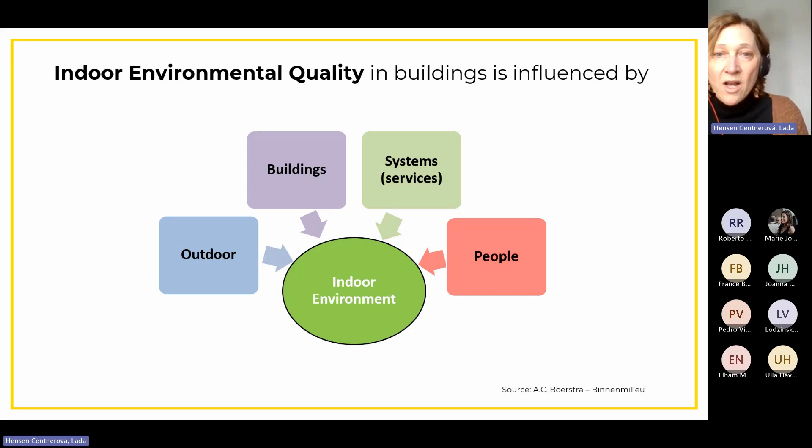First of all, what is indoor environment quality in buildings? Just to be on the same line, I would like to show you that the indoor environment in buildings is actually influenced by the outdoor environment, by the buildings themselves, by building systems, and by people. So I will start here with outdoor.

We live nowadays in a period when climate change is getting more and more obvious. Everybody gets confronted with it, and we have to adapt ourselves and our buildings. Our landscapes are changing, weather conditions, and actually HVAC systems. We have to adapt to it.

So what can we do about it? We have to adapt. You are actually joining the Healthy Building Design Competition, which is organized by REHVA. And I'm not sure if you all know it, but REHVA is a European Federation of National Associations of HVAC engineers—HVAC: heating, ventilation, air conditioning.

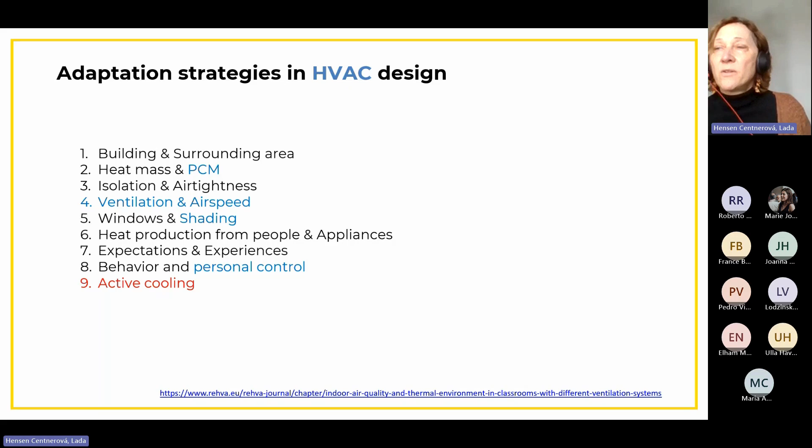First, adaptation strategies related to buildings. You know it—one of the consequences of climate change is the urban heat island effect. I don't know if you heard about that, if you learned it at university, but actually the first time this was referred to was in 1799 in New York, where Noah Webster reported a 0.8 degree difference in year-mean temperature between New York and rural areas.

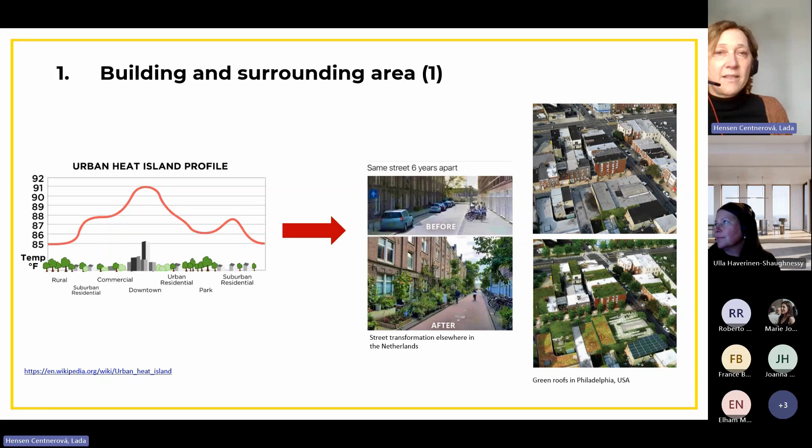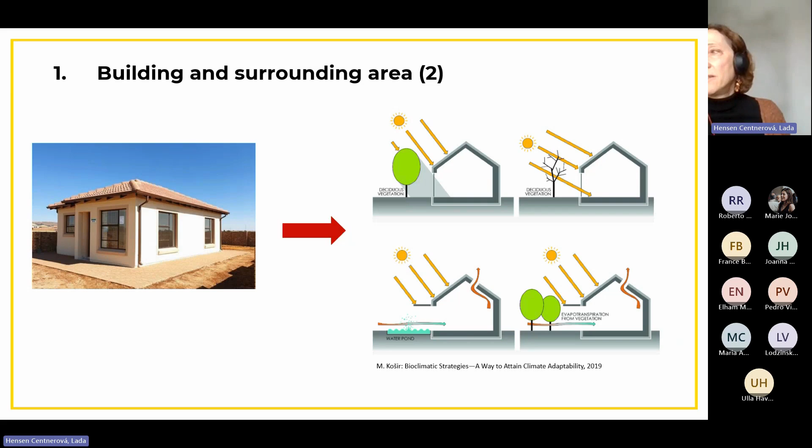Of course, nowadays these differences are much bigger. I live in the Netherlands, and here the year-mean temperature difference between big cities and rural areas is 3 degrees, but on a day basis in summer it can be even 7 degrees. So of course you should take this into account in your design. This is what you can do: start with the direct surrounding of your building, with the possibility of trees which give shade in summer but let the sun shine through in winter. But yeah, I think you know this.

Another thing, if we look at building constructions: we all know that old massive buildings are also very nice and cool in summer. I took here the most extreme example I found, which is Uçhisar in Turkey. These heavy, massive old buildings are cool inside even in summer, because of that large thermal mass, which acts as a heat storage, or if you would like, a battery.

On the other hand, light constructions raise temperature very fast, even above the outdoor temperature—here again an extreme example, just a tent. So heavy construction seems to have an advantage, but it is actually not always possible or desired to realize heavy construction. So it is well possible to create a similar effect in light constructions by applying phase-changing materials. PCMs have the ability to store a large amount of energy in the form of latent heat. So that's another possibility.

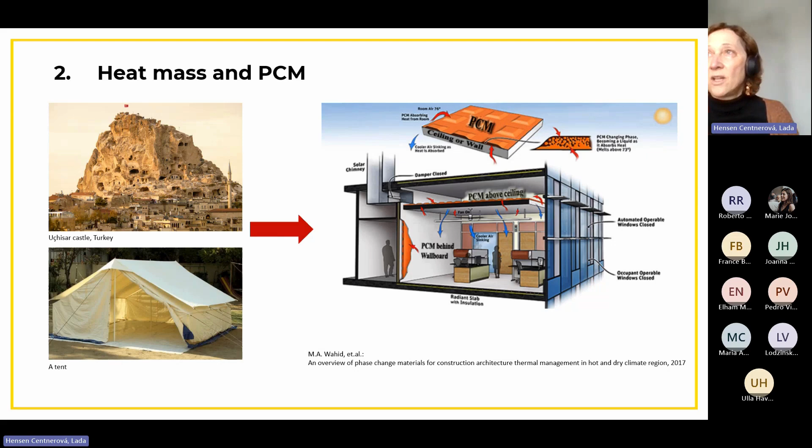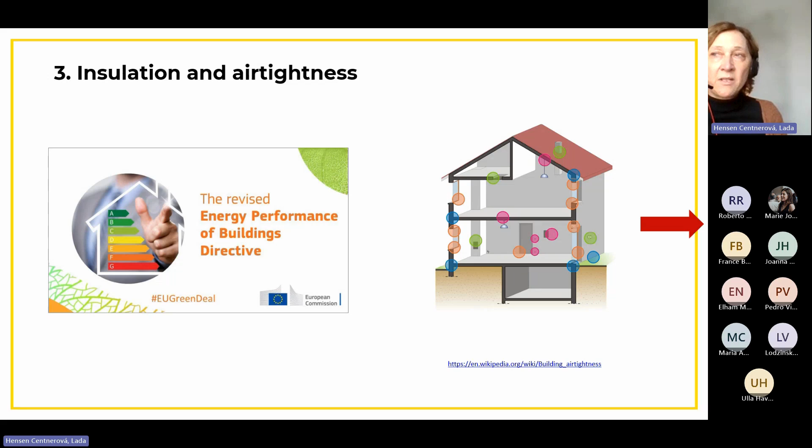With climate change and changing buildings, we have a problem related to still growing stronger norms about insulation and airtightness. I'm not sure how the situation is in your country, but I think everywhere in Europe buildings are getting more tight and airtight, which is reducing heat loss through the building envelope. That's very good for winter, but if we don't have other precautions, then we get problems in summer.

The solution can be good functional ventilation, or even higher airspeed indoors. I'm not speaking about just the standard ventilation, which has to maintain good indoor air quality, but also natural ventilation, which can be caused by two natural forces: pressure differences or temperature differences, or a combination of both. Here are some extreme examples of natural ventilation and fast air movement, higher airspeed using ceiling fans.

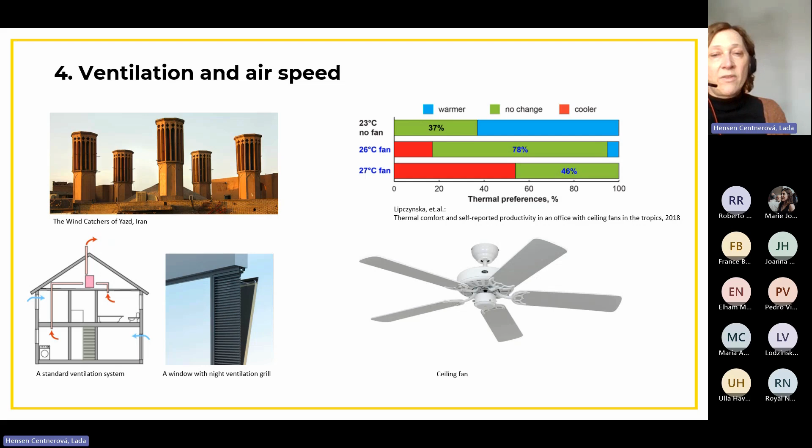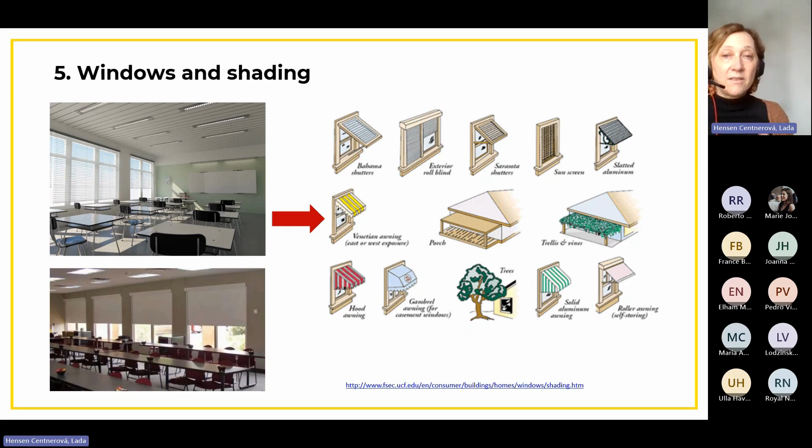But of course, you have to take into account that there must be a balance between sufficient daylight, view, privacy, and unwanted solar radiation.

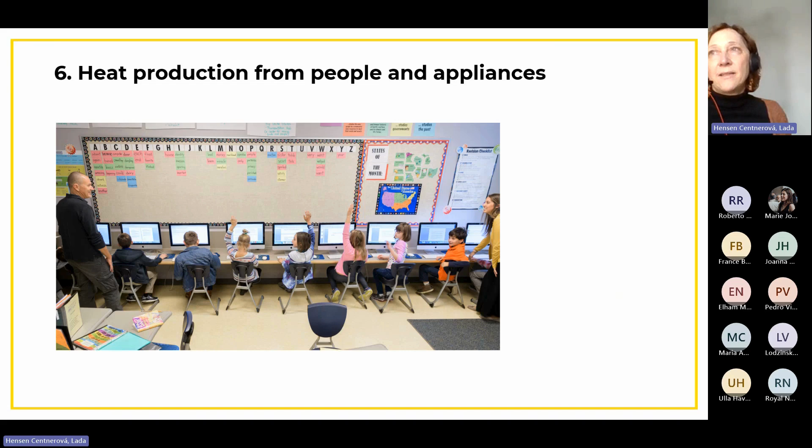Another adaptation strategy or problem from my list is heat production from people and appliances. I know in primary school this problem is less urgent, it's not like at the university where all students are sitting with laptops. But nevertheless, I found an illustrative photo from a primary school where all kids have a laptop. But here, this is not such a big problem.

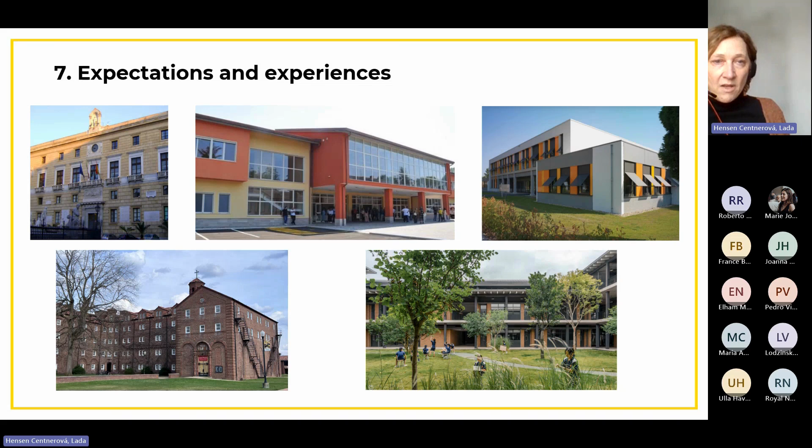Another thing I tell my students is that you have to take into account design expectations and previous experiences. Here's an example of schools which I looked up on the internet, most of them supposedly in Italy. Of course, if you go to a very old, massive building, you somehow expect a little bit different environment than in a very light new building. So all this is related.

You don't have pupils here who can adapt themselves except to take off a sweater, but there is the boss, and that's the teacher.

So this was just a short, quick introduction to what you should take into account when redesigning a school in particular.

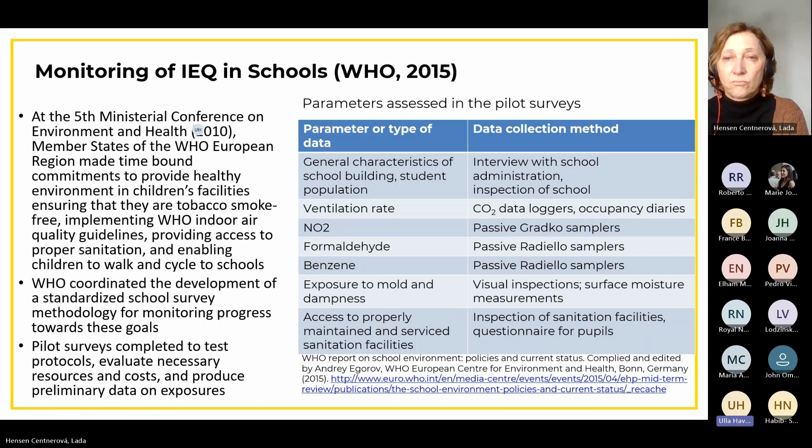The data collection methods are listed there. They may be a little outdated now; there are new methods perhaps, but overall it was assessed that these are important factors for school environment and indoor quality. Many of these are indoor quality related. If I remember correctly, based on the pilot studies, most issues were found in those schools in areas providing inadequate ventilation, issues related to dampness and mold, and also thermal conditions in the classrooms. So those are important things to consider.

An example of how this lead-by-knowledge principle could work is one of our studies in Finnish elementary schools, where we collected data from basically all Finnish elementary schools using questionnaires for school principals. We found that inadequate ventilation was reported in 38% of the school buildings, dampness and moisture problems in 27%, and unsatisfactory temperature in 11%.

We also did some subsampling with objective measurement data collection, including measured ventilation rates, and those results were quite well aligned with the principal-recorded issues, where our current national guideline is a minimum of 6 liters per second per person ventilation rate, and roughly 60% of schools are below that value, I believe.

So we also collected data from students using questionnaires about their health and background variables, and found with these two data sets combined that these school-level indoor environment quality indicator variables that the principals reported could explain a large part of the school-level variation observed in self-reported upper respiratory symptoms among students. So improving these conditions in Finnish schools could be effective already.

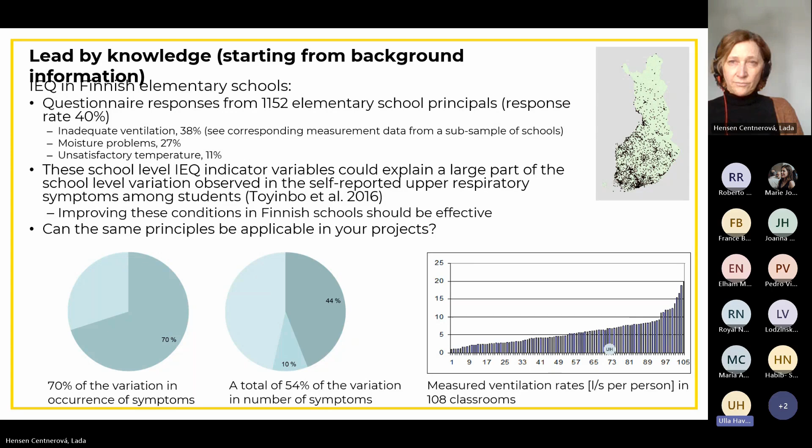We could explain a large part of the school-level variation in the reported symptoms. So it's just a question of whether these same principles could be applicable in your project. I think it depends on the region or the country. Some of the issues are country specific, but overall, starting from background information collection is always important, so you can think about ways to collect such background information that helps you successfully design and complete your projects.

I was involved with a European study on dampness and mold called the HITEA study, conducted in the Netherlands, Spain, and Finland. As a result, it was found that the prevalence of moisture problems in school buildings was 20% in the Netherlands, 41% in Spain, and 24% in Finland.

This was back in, I think, 2008 to 2012, so about 10 years ago. It was also found that the occurrence and severity of dampness and mold may vary across geographical areas, which can be partly explained by building characteristics. Health effect studies were also conducted and found that avoidance or remediation of damp and mold problems in school buildings may benefit students' respiratory health.

I haven't worked a lot on filtration and air cleaning technologies, but wanted to show some examples, mainly from the point of view of the possibility to filter and clean air. If you have a school building like the figures on the left from an African country, very open, leaky buildings, there is limited possibility to filter anything.

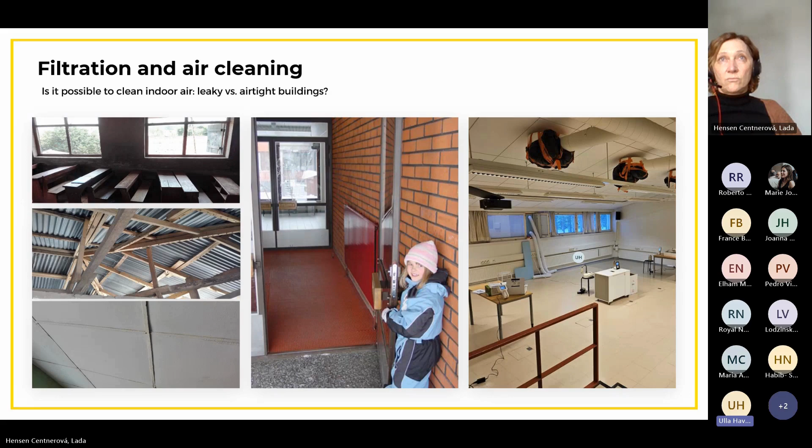I have been involved with several studies looking at the associations between ventilation and health and academic performance. Here are results from an early study done in the United States on the association between substandard classroom ventilation rates and students' test scores, where we found a linear association between substandard ventilation rate and these test scores. So it's an important parameter to think about when designing school buildings.

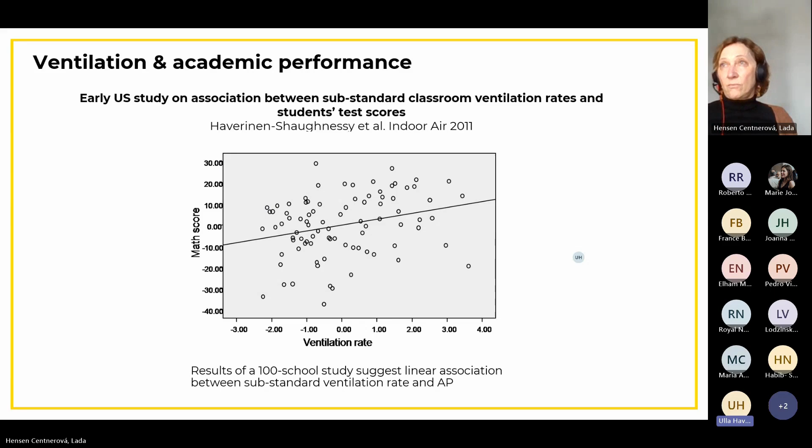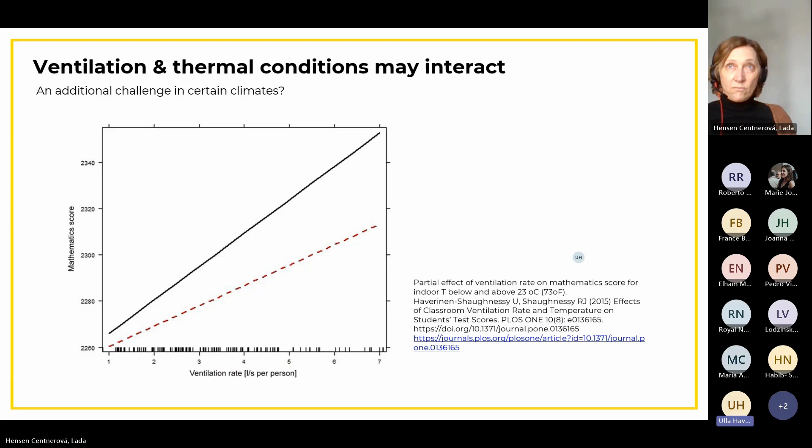We also looked at the effects of temperature on test scores, and it's quite interesting—it looks like there may be an interaction there, such that the effect of ventilation is stronger if the temperature is higher, and this can be an additional challenge in certain climates, perhaps.

And as has been brought up quite strongly, ventilation also associates with illness absence, especially since the COVID pandemic. There have been a lot of studies and even review articles emphasizing that ventilation is really important and potentially decreases illness absence and mitigates the spread of infectious diseases.

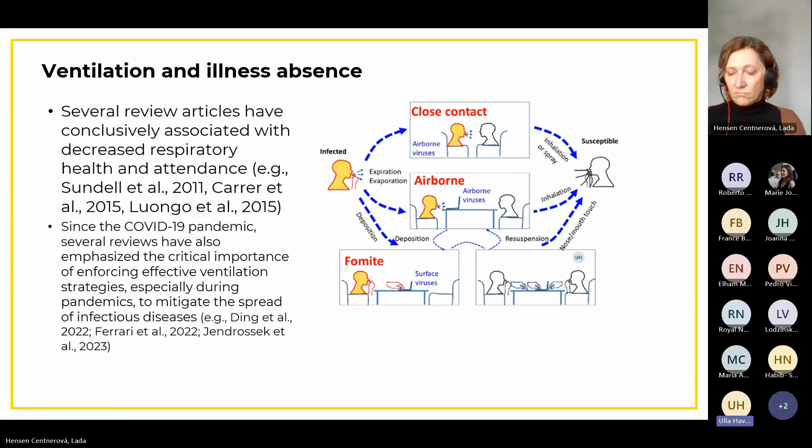On the picture, there are different pathways how infectious disease can be transmitted. They can be transmitted by air or close contact, or also by indirect contact to contaminated surfaces, which brings us to the cleaning aspects and cleanliness.

There we can say that inadequate cleaning also leads to accumulation of dust and non-visible ecological niches, which can promote biological contaminants, including viruses.

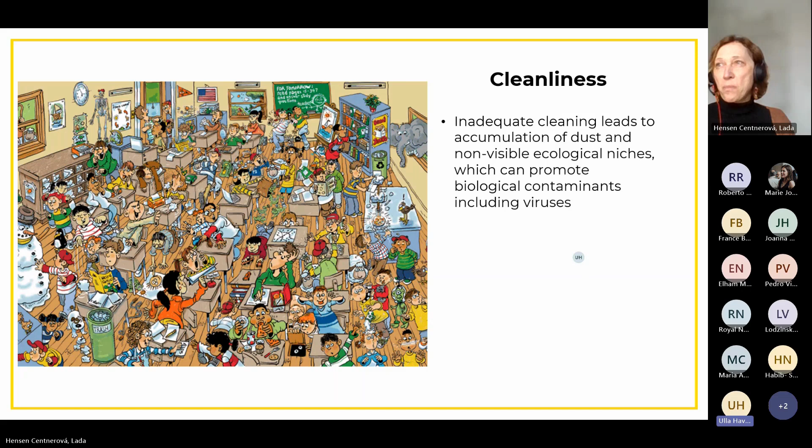Here's an example of a study where we found a statistically significant association between the probability of weekly absence due to gastrointestinal illness and desktop ATP levels, which ATP is an indicator of biological contaminants on the surfaces that were monitored.

It was also found that with respect to cleaning effectiveness, critical points to consider include the frequency of cleaning of different surfaces, especially high-touch surfaces, training the custodians and school personnel, as well as monitoring and feedback.

In this study, it was not possible to differentiate whether the microorganisms on the desktops were coming from prior occupants or by settling from the classroom air, and also the ventilation may play a role in that settling of microorganisms on the surfaces.

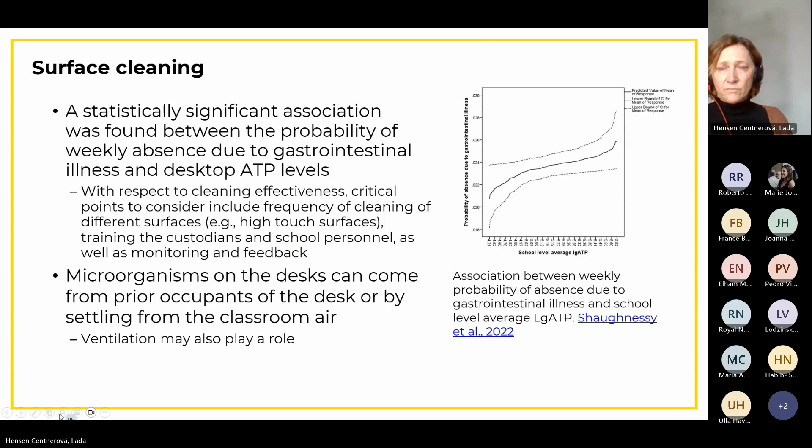There are some ways to practice what I've called pollutant avoidance, including selecting building materials and products and trying to decrease chemical emissions. Also, pets and plants are sometimes found in schools, sometimes in large numbers, and there can be—some people think they have positive effects, some think negative effects—but in any case, for sensitive or allergic individuals, perhaps it's not so beneficial to have them in the classroom.

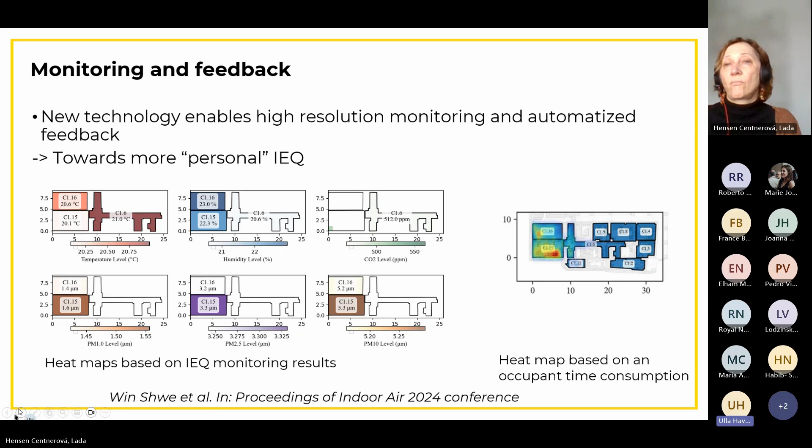Interesting area of research—there are new technologies that enable high-resolution monitoring and automatized feedback in this area of indoor environment quality and indoor air quality. For example, I'm showing heat maps based on continuous monitoring results and also occupant time consumption, and perhaps developing these technologies can help towards more personal indoor environmental quality, allowing occupants some way of having better influence over their own personal environment.

So I don't know if we have time to look at this example. It was actually just recently. I think, yeah, just go ahead.

We have been involved with this school district-wide renovation follow-up study over the past 6 or 7 years in the US, in collaboration with the University of Tulsa and the University of Colorado Boulder, where we have followed up district-wide renovations, indoor environmental quality, and illness absences.

The research in brief was such that there were over 50 schools in this one school district that had over 600 million dollar bond renovation program, where renovations were implemented in about 45 schools across multiple different projects. Significant upgrades were done, including ventilation systems and improvements in cleaning effectiveness, as well as with the aim to conserve energy.

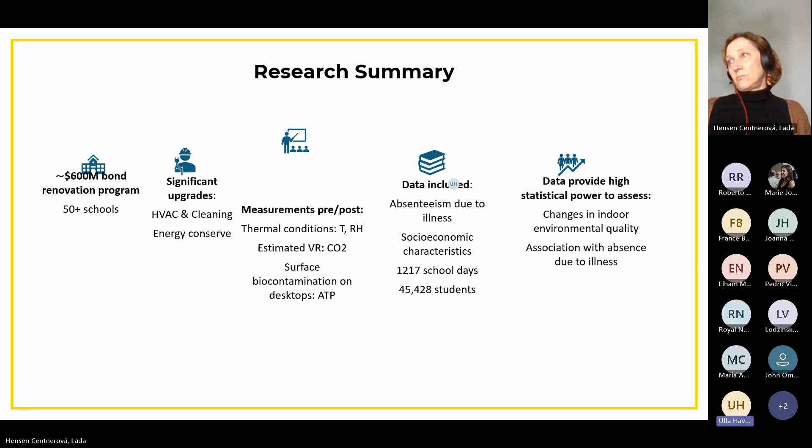So energy efficiency and energy retrofits were included. We followed up the conditions before and after renovations, including thermal conditions, estimated ventilation rates using carbon dioxide monitoring, and also monitoring of surface biocontamination by ATP. We also had access to absenteeism data specifically related to illness and the type of illness. These data were collected by the school district, and they also provided us socioeconomic characteristics of the students over this whole six-year follow-up period, including a total of 45,000 students. So the data provide high statistical power to assess changes in indoor environmental quality and association with absence due to illness.

We assessed the number of days absent per school year by students, and we found statistically significant associations between number of days absent and the renovation status. Absence days due to respiratory illnesses were significantly decreased, as well as absence days due to gastrointestinal illnesses. In addition to these associations with renovation status alone, there were independent associations with higher number of days absent due to respiratory illnesses associating with lower ventilation rates and higher indoor temperatures and relative humidity, whereas higher number of days absent due to gastrointestinal illnesses associated also with higher indoor temperature, relative humidity, and ATP.

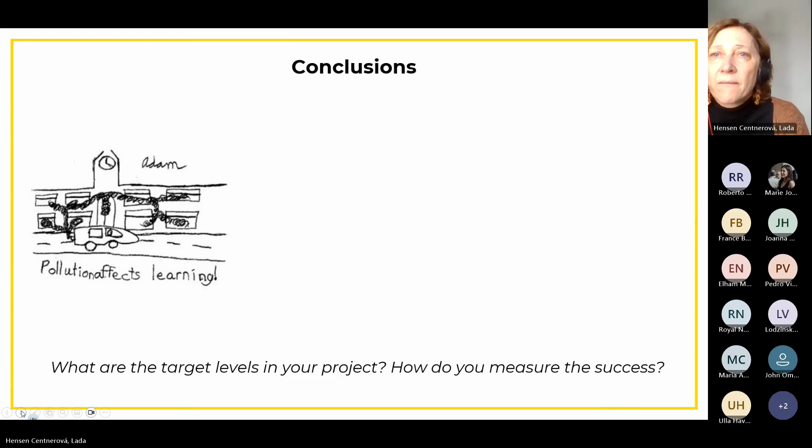So based on this example, we concluded that ventilation rates were significantly increased and biocontamination levels decreased after renovation. Decreased number of days absent were associated with improved ventilation, cleanliness, and thermal conditions, and the results support maintaining good indoor environmental quality for better school health and reduced absence due to illness. It was also found to be helpful having continuous monitoring and feedback to reach and maintain the target levels.

I think these kinds of endpoints are good to have and assess, and in this design challenge, maybe it's good to think about what are the target levels in your projects and how do you measure success.

Overall summary: indoor environmental quality is frequently compromised in schools worldwide. Growing evidence is linking poor IEQ in the classrooms to student health and academic performance. I think especially schools and the education sector as a whole have a large potential for health and sustainable development, leading by example in providing healthier and more productive environments, while also reducing their carbon footprint.

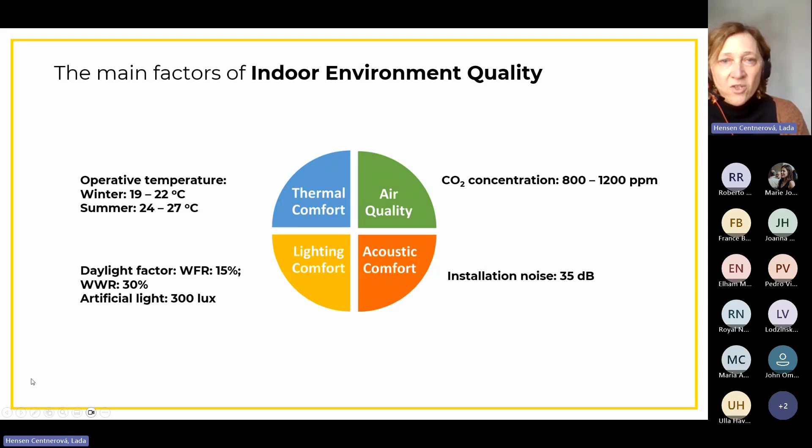I just put here a few numbers for each of these factors, which are generally used. But let's just go further.

We said that already a few times. Buildings are used by people, and how do people actually experience that indoor environment? Maybe you are aware of that. If not, I put here a slide I like to use in my teaching, that people feel indoor environment with 4 of the 5 senses, the main senses.

As you see here, with our skin, our touch, we sense temperature differences, humidity. With our eyes we see, with our ears we hear, and with our nose we smell indoor air quality.

But not everything. There is often that problem that we don't see the air which is bad, because we can smell tobacco smoke, but you are not allowed to smoke in schools. Sometimes we smell cleaning chemicals, part of VOCs, and sometimes we smell people odor, but not everything. So these are the senses by which people experience buildings, and I think you, as designers, have to take into account all of these senses, all of these parts.

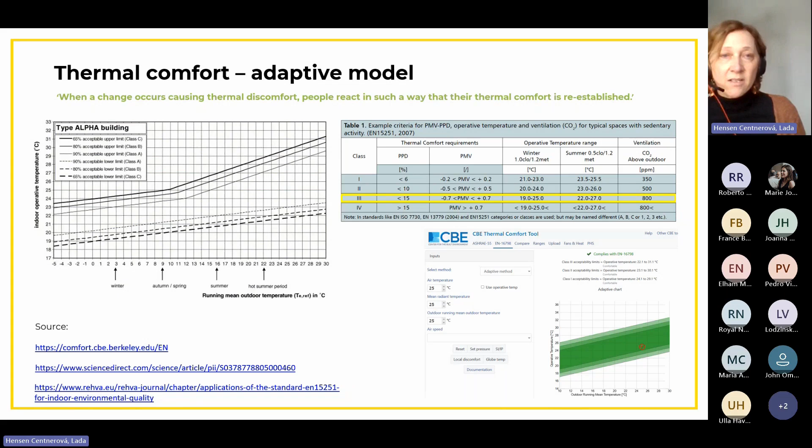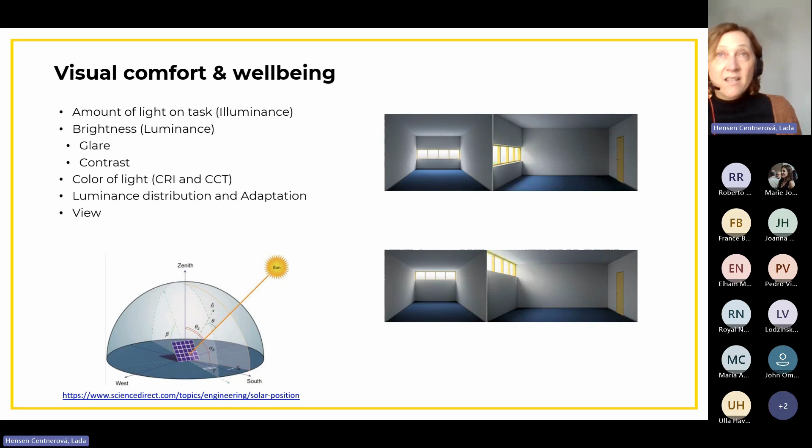Here I put something about lighting or visual comfort. Of course, lighting is about the amount of light on a task during the day, or when we need artificial light. But it's also about brightness, whether there is glare or too high contrast. It's also about colors, and about view. All these things should be taken into account in good design.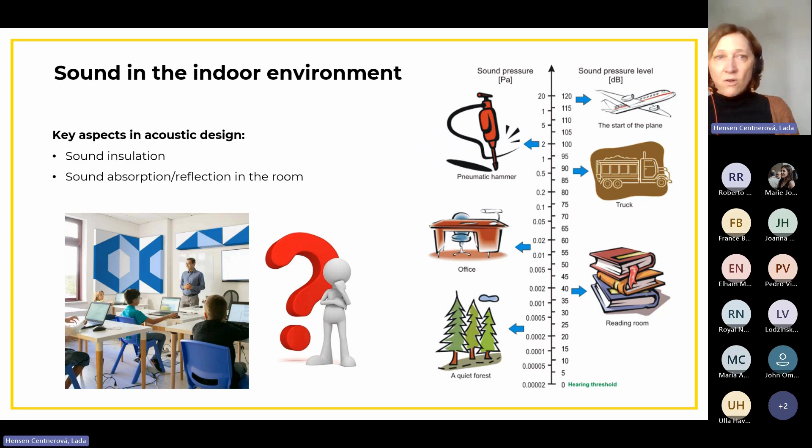In a school building, you should think of the materials which are going to be used there, not only for sustainability, but also for acoustics - absorption or reflection. So this is just a quick overview of indoor environment quality, what needs to be taken into account.

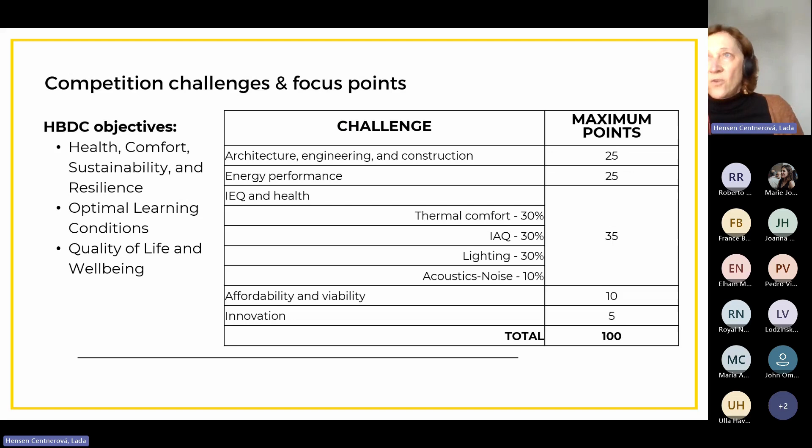Now I have here just a few recap slides about that, which I took from last week - the deadline is 28 February. Here are the competition challenges and focus points. But you know all these things, or you can find them elsewhere. Here I also copied the main points related to indoor environment quality and health, what you should focus on - we just tried today to give you more info and ideas.

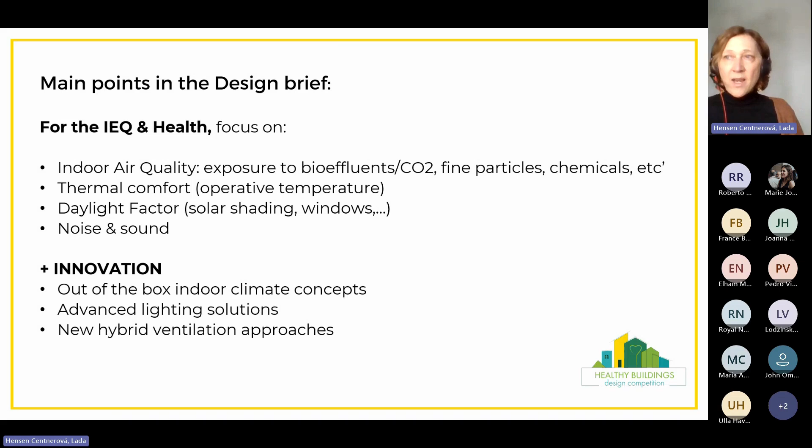What is here, we are looking - you shouldn't forget all these things about indoor environment quality, but we are looking in this competition for innovations, your point of view, out-of-box thinking, advanced solutions, hybrid approaches, etc.